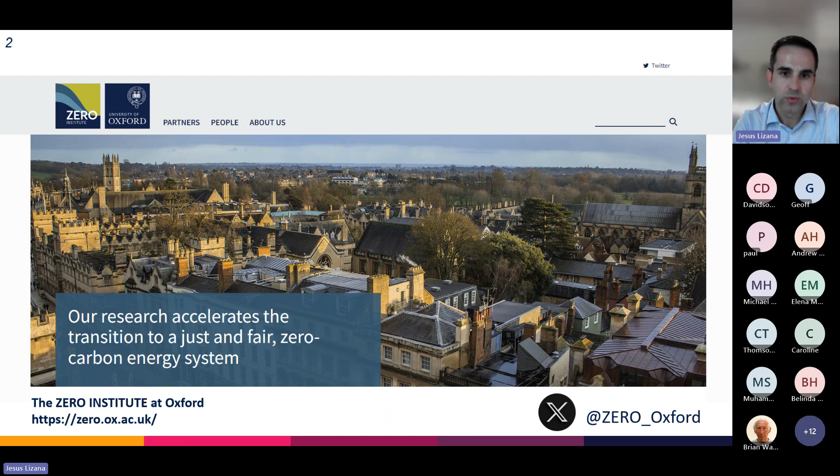Yes, well, thank you for the invitation. I am an associate professor in engineering science in the University of Oxford. I started in January as a leader of the zero carbon space heating and cooling research at the Zero Institute at Oxford, where we are working together with local partners and international institutions to try to accelerate the transition to net zero. But I started in Oxford 3 years ago as a member researcher of the Future Cooling Program, where our interdisciplinary team were working together to shape and understand the future of cooling. My presentation here will be part of the work that we were doing during this time.

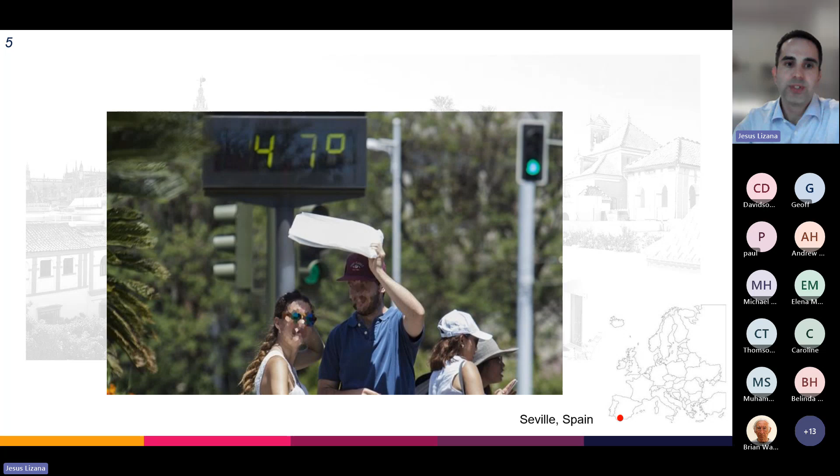But first, I would like to start talking about where I come from. I am from Seville in southern Spain, a beautiful city known for its amazing food and fantastic weather. A fantastic weather, but with last summers reaching temperatures higher than 45 degrees Celsius, something that we never saw before. This is really creating an issue in Spain, but not only in Spain, even in Oxford. You remember last summers, we saw for the first time in Oxford temperatures higher than 40 degrees Celsius. Not only in Oxford, but throughout the whole UK.

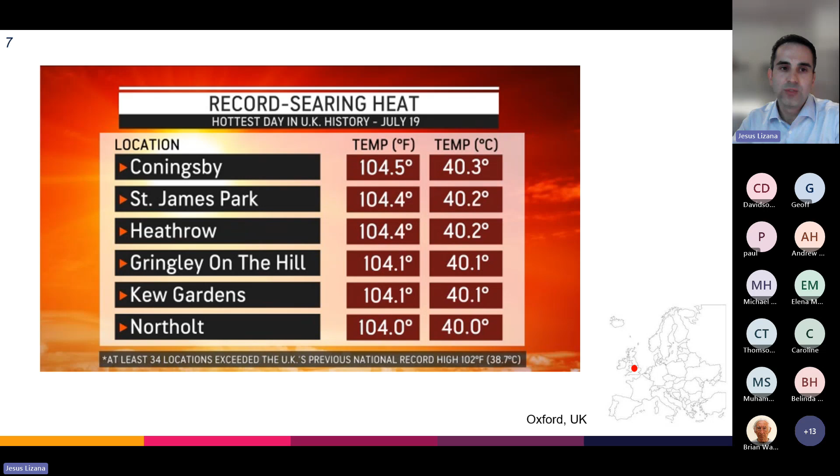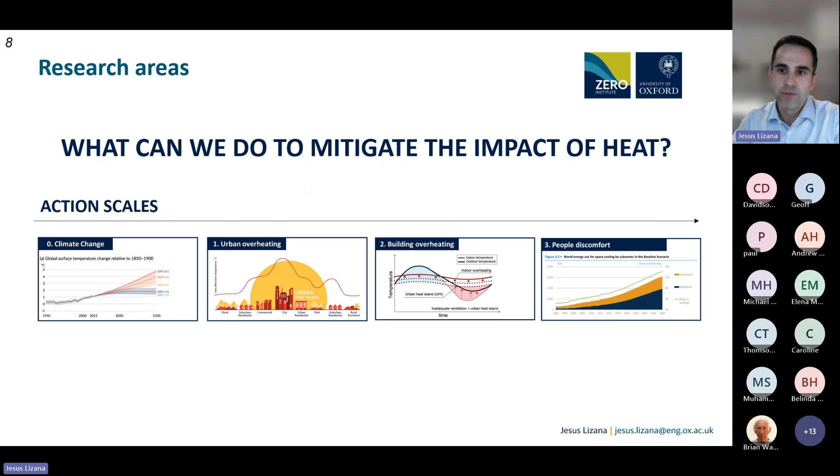We are starting to see temperatures higher, temperatures that we never saw, and temperatures which we may need to deal with in the future. So it's clear that climate change is happening faster than expected. To address this problem, we were working at different action scales to try to understand and mitigate climate change, to try to understand and reduce the problem of urban overheating, to mitigate the problem that we are having here in the UK of building overheating, and to address people's discomfort more efficiently, decreasing energy demand for cooling. A work that we lead locally and internationally, in collaboration with more than 40 organizations and institutions globally.

In this presentation, I will focus on two main points: the impact of rising temperatures, and I will talk a little bit about the impact in the UK specifically. Also, I would like to show the right steps to sustainable cooling. What can we do in the building industry, in building services engineering, to address sustainable cooling in the future? I will start with the first part, with the impact of rising temperatures.

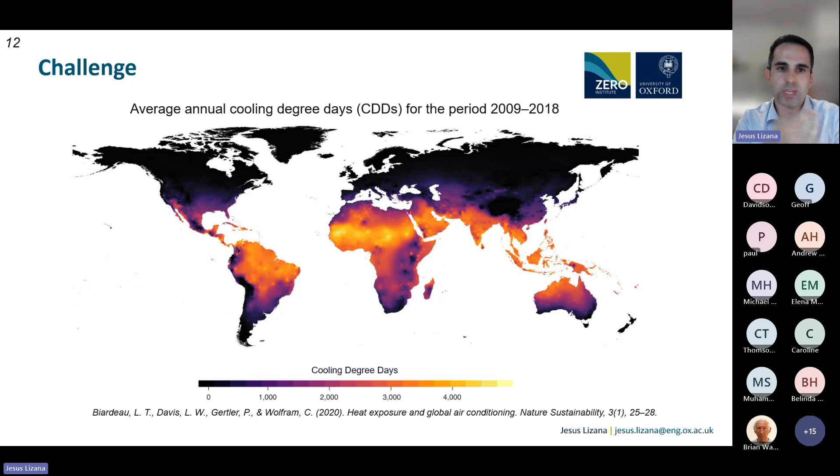Currently, most of the cooling needs and cooling demand are located in the tropics, where half of the global population lives. A common indicator that we use to quantify these cooling needs or heat exposure is cooling degree days, the indicator that you can see in this map. This is an annual indicator based on the difference between the daily average temperature and a reference temperature, often set at 18 degrees Celsius. So, for example, if we have a day with a daily average temperature of 20 degrees Celsius, for that day we will have 2 cooling degree days. Basically, with this indicator, what we do is sum all these cooling degree days per day throughout the year.

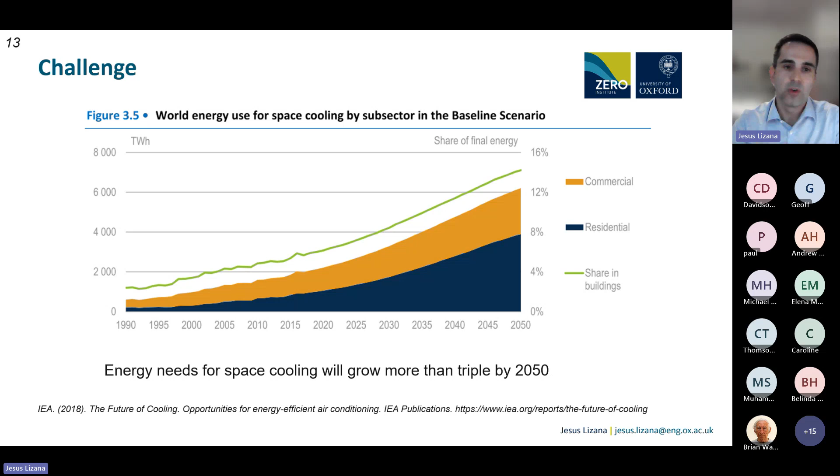Climate change is increasing this cooling demand globally, and is expected to more than triple by 2050, according to the International Energy Agency, with heat events occurring more often and longer. This is affecting seriously people, infrastructure, the environment, and the economy. It's increasing morbidity and mortality. There is even a recent report from Europe showing how 90% of all climate-related fatalities in Europe are related to extreme heat.

According to the International Energy Agency, it is projected that 10 new air conditioning units will be sold every second from here to 2050, increasing the energy demand for cooling drastically and adding additional pressure to power grids. This is going to increase the demand for fossil fuel. At the same time, in the economy, rising temperatures are also affecting productivity, starting to seriously affect strategic sectors such as tourism and agriculture. In Europe, a recent report highlighted how heat-related economic losses are right now close to 14% and increasing annually.

We might assume that extreme temperatures are the only issue here, and they may not occur frequently in the UK. But let me ask you this question: what is worse, 30 degrees Celsius or 40 degrees Celsius? Which temperature is likely to have a more severe impact on people, infrastructure, environment, or economy? Yes, this is a trick question, but it's important for explaining the next point.

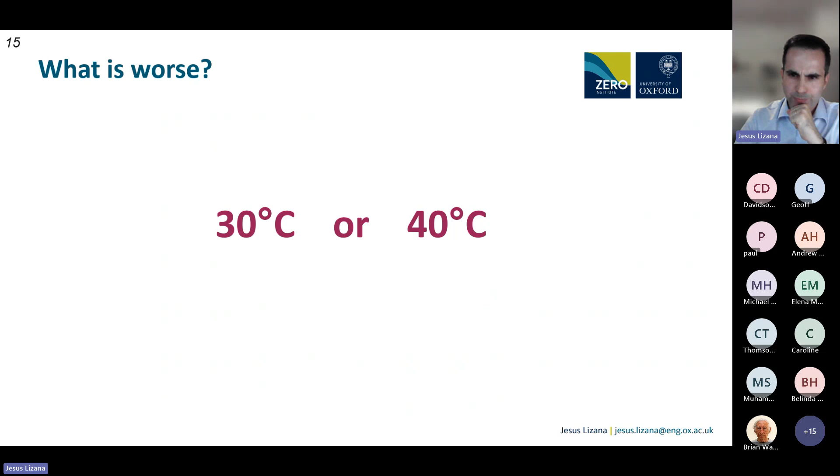I will answer the question later. A good example to understand the right answer is the definition of a heat wave. We call a heat wave 3 consecutive days with maximum temperatures meeting or exceeding a heat wave temperature threshold that is normally close to the 95th percentile of the daily maximum temperatures historically.

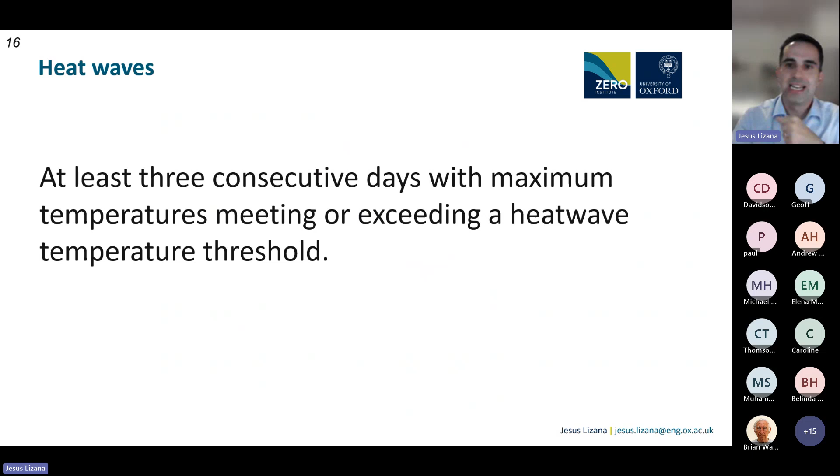Let's compare two different regions, the UK and Spain, where I come from. Something interesting is that in the UK, a day with a maximum temperature of 30 degrees Celsius is a heat wave. This will be a very extreme situation, generating a lot of impact. However, in Spain, in Seville where I come from, we can see how a day with an extreme temperature of 40 degrees Celsius is a normal day. It's not a problem. This is the most important thing to understand.

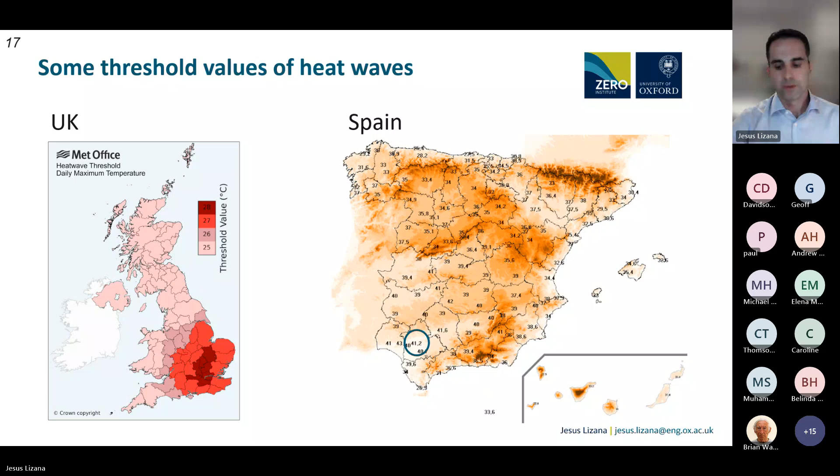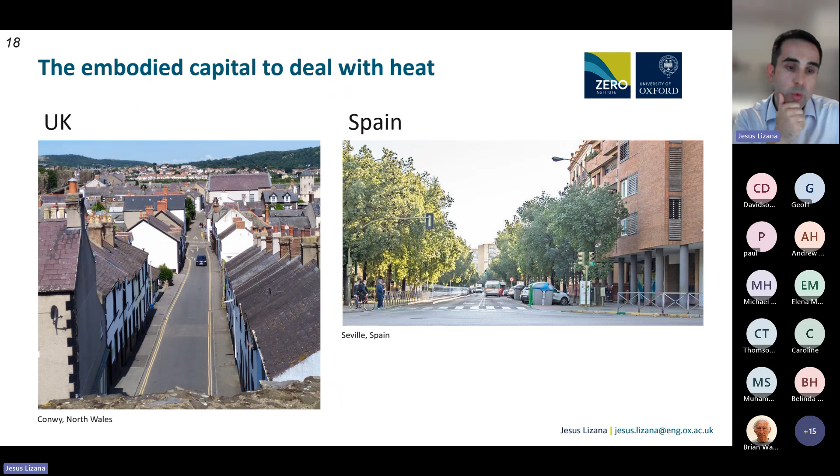Why these strong differences? The main reason is the embodied capital to deal with heat, the physical and sociocultural capital. Understanding the embodied capital in our built environment is crucial to quantify the implications of heat. Here you see two pictures, for example, in the street where I live in Seville, and one in Conwy, a city in North Wales, on a summer day.

This was the main driver that led us to our recent publication in Nature Sustainability. It is not about the maximum temperatures, it is about the relative change. In this article, we wanted to identify and quantify what countries will be highly affected by the absolute, but also by the relative change in heat, in temperatures. So we answered the following question: if the global mean temperature rise increases from 1.5 degrees Celsius to 2 degrees Celsius, what countries will experience the most dramatic increase in heat exposure and cooling requirements worldwide, in absolute and relative values?

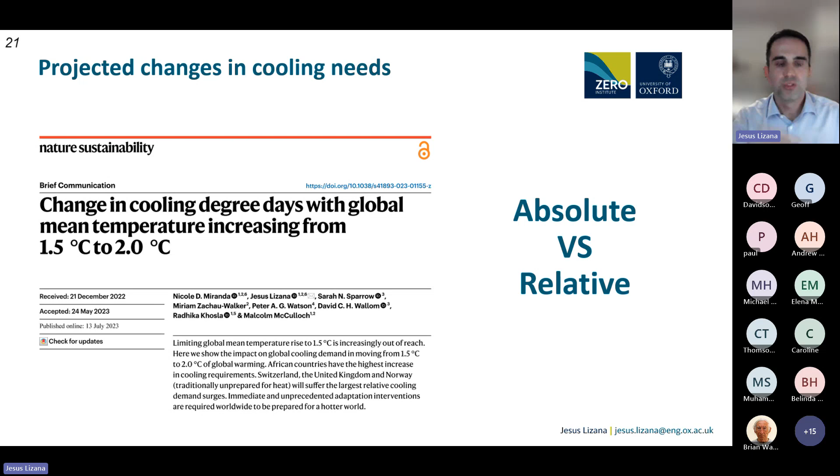Here we find something we already know, that in the tropics we have the countries that will suffer the highest absolute increase in heat exposure and cooling needs globally. Specifically, the top 10 countries most affected are in Central Africa, which will add additional pressure to the socioeconomic development of these regions. So all these regions in the tropics already have the highest cooling needs globally, but they will also suffer the highest absolute increase in temperatures.

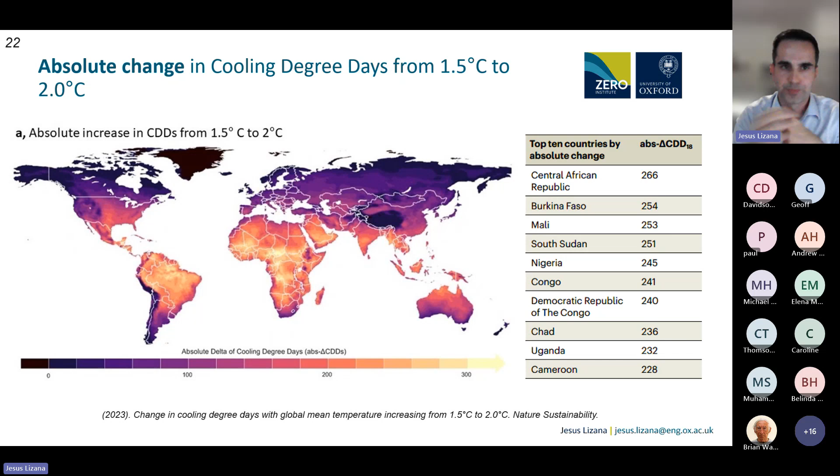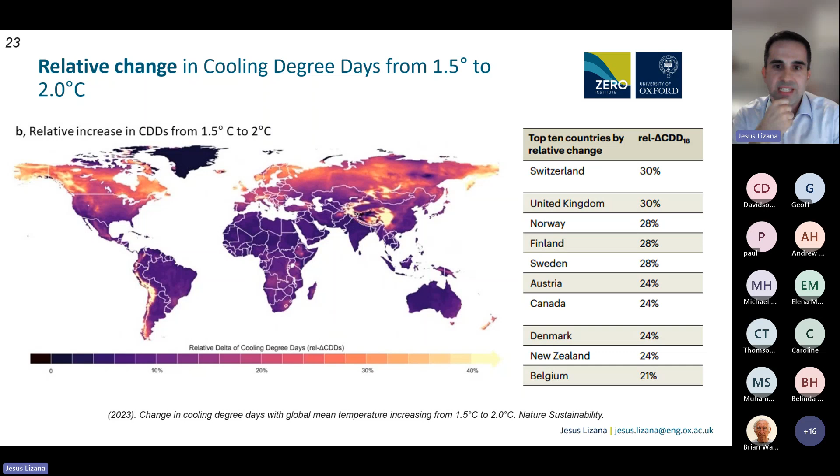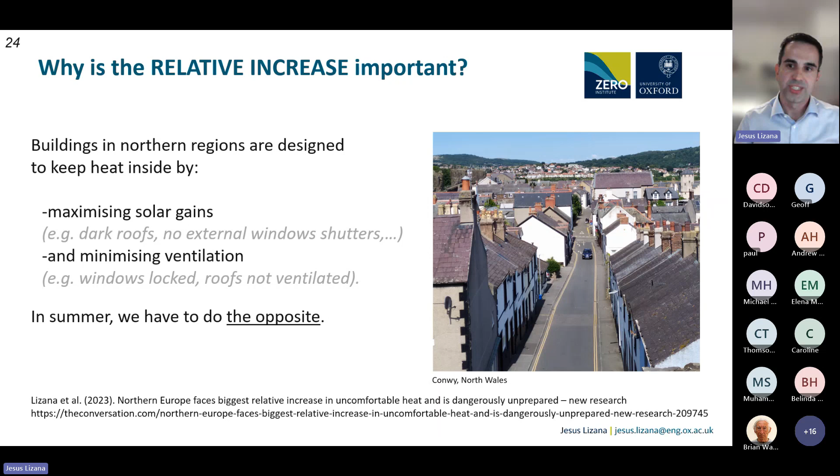Why is the relative increase important? Buildings in northern regions are designed to keep the heat inside by maximizing solar gains and minimizing ventilation, because basically what we want to do is reduce the heating needs in winter. The problem is that in summer we have to do the opposite. So here, even with a moderate increase in temperatures, the impact of the extra heat will be felt more acutely. It's important to recognize that heat is not just a concern for southern regions. Adaptation interventions and measures are needed globally to prepare for a hotter world.

But how can we avoid this problem, overheating in the north and in the south? How can we address sustainable cooling in the UK? This will be the second part of the presentation.

Let's imagine the situation, which can be a home in the UK or a home in a North European country, in which we have high solar gains with dark surfaces and no solar protection in windows. We may have windows opening outwards, so we cannot install window shutters. We have building lofts that are not ventilated, increasing the overheating. And we may even have homes that are not well insulated.

It's quite easy to see that with these conditions, we may have outside 26 degrees Celsius, but suddenly inside the temperature is much higher, even higher than 30 degrees Celsius. And this can be perfectly a normal summer day in my office here in Oxford, where outside the temperature is not that high, but inside the overheating is increasing drastically. What can we do here to address sustainable cooling and reduce this indoor overheating?

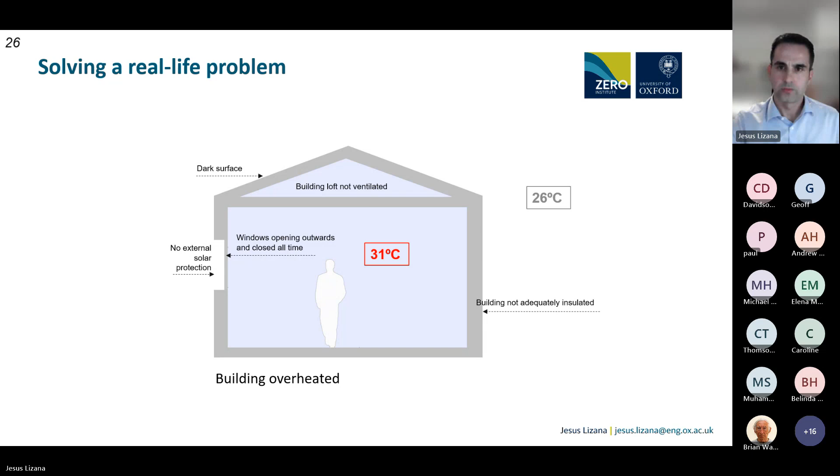First, we need to understand the real meaning of cooling. What is cooling? Cooling is not only an air conditioner. A wide portfolio of solutions for cooling is already available to address cooling efficiently.

We need to consider that the adaptation of the built environment to warmer temperatures requires the development of the best available technologies and techniques for cooling. And these cooling solutions can be classified using 5 key concepts.

Solutions for solar protection to reduce solar heat gains, for example, cool surfaces, green surfaces, or shading for openings, or adding external vegetation. Solutions for heat prevention involve mitigating or avoiding external and internal heat gains through the building.

External heat gains arise from the ambient temperature transferring heat through the building envelope. Internal heat gains can be due to human activities, appliances, or lighting coming from inside the building.

Heat modulation consists of using the thermal mass of the building to store heat gains and release them at optimal times. For example, using free cooling at night or natural ventilation at night.

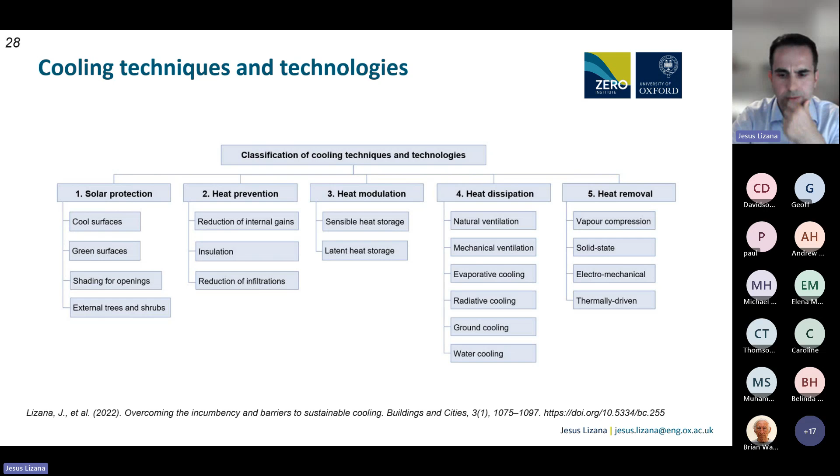Despite this extensive portfolio, the main problem is that the easiest and fastest response to address cooling still lies with the installation of an air conditioner, commonly regarded as the sole technological solution to address cooling.

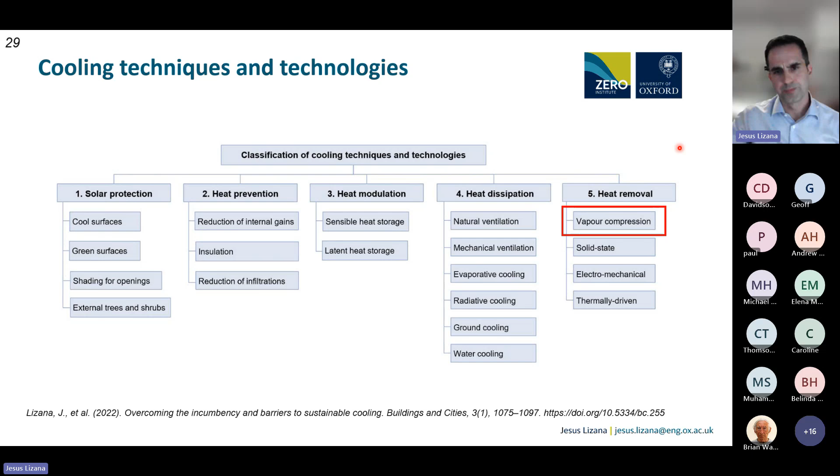With all these options, what are the right steps to address sustainable cooling? How can we do it efficiently in an optimal way? Well, our recommended steps are 8. Implemented following the right order, they can increase the heat resiliency of the built environment. They can downsize cooling systems and cooling needs. And finally, they can decrease resource consumption and mitigate the environmental impact of cooling.

Of course, these steps should be implemented considering current and future climate conditions, and considering heating and cooling as a whole in the building design. We don't want to increase the energy demand for heating in winter, and this is quite important. It's something that we need to consider carefully in the UK.

Let's start with the first 4 options, the first 4 steps. These steps are related to solutions that I was introducing previously: solutions for solar protection, heat dissipation, heat modulation, and heat prevention. Solutions that we normally call passive cooling techniques. And these solutions are not new, they are well known in the building industry.

For example, for solar protection to mitigate solar heat gains in opaque surfaces, we can implement ventilated and reflective roofs or ventilated and reflective walls. And in the openings of the building envelope, we have a large portfolio of shading devices that we can integrate in buildings according to the building orientation to reduce the amount of solar heat gains.

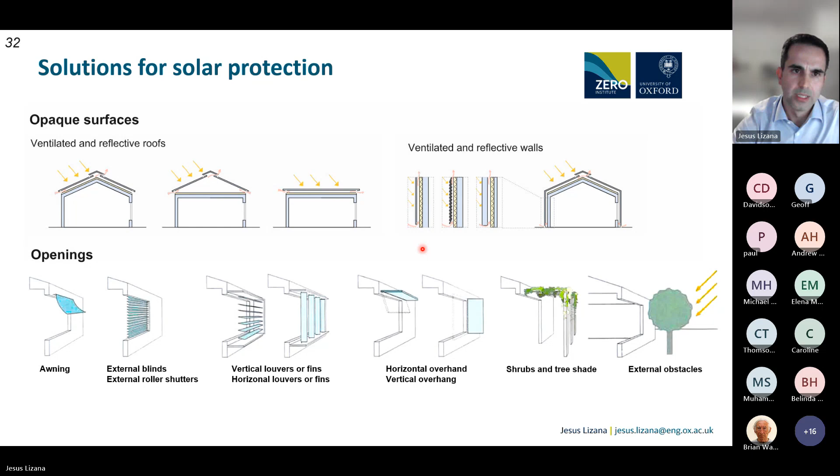The same for heat dissipation. In this case, for natural ventilation, we can promote natural ventilation driven by wind, by solar, or by the stack effect. We can find really powerful solutions, for example, cross ventilation or using ventilation chimneys. We can increase the air change rate in the building largely.

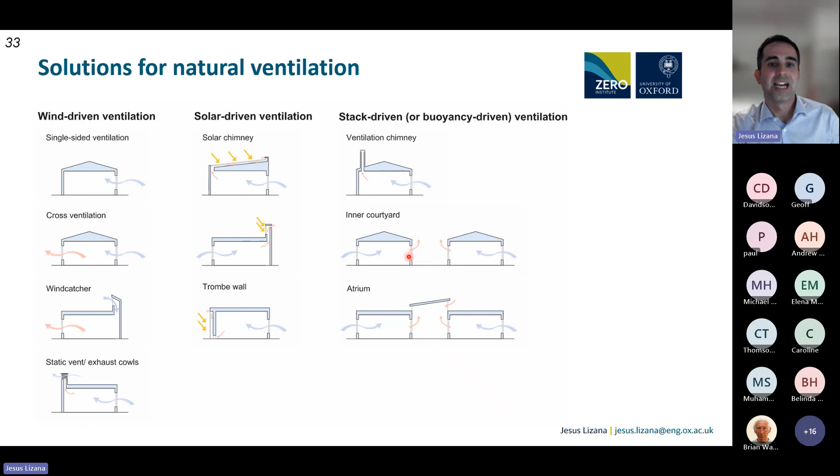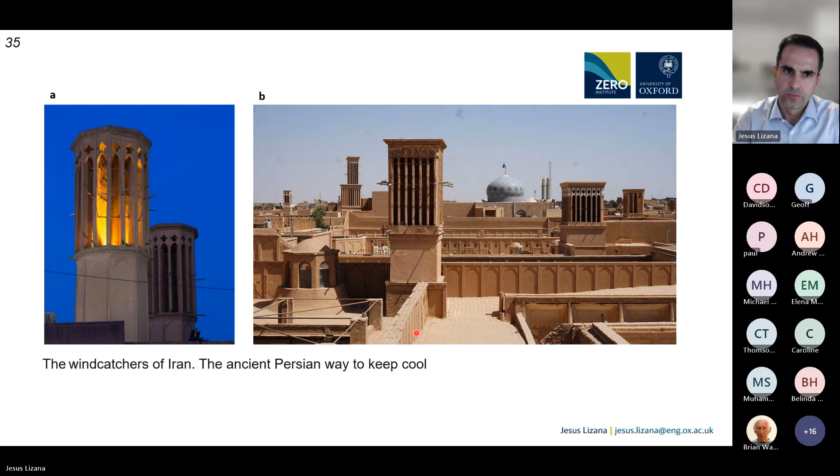If we address these 4 steps efficiently, we have a great chance of eliminating the need for air conditioning. But even if not, we still have different alternatives that we can integrate to reduce even more the cooling needs and downsize the cooling systems.

The 5th step consists of using more thermal comfort variables to create comfort. And the 6th step is recognizing the individual real cooling needs through an occupant-centric technology or design.

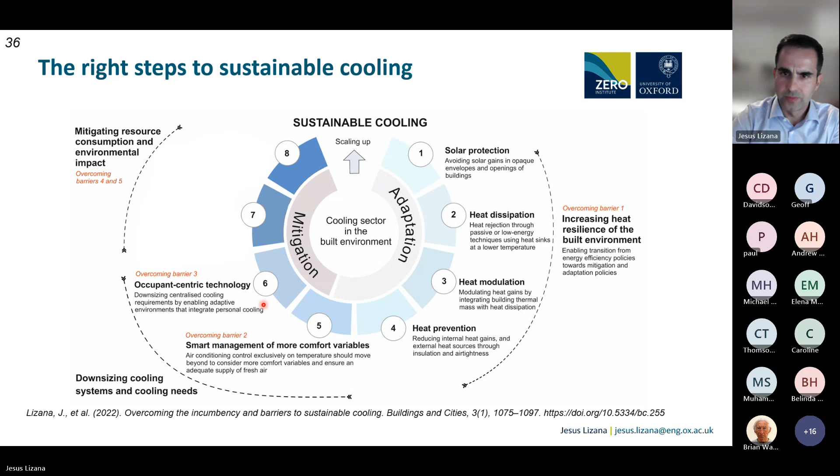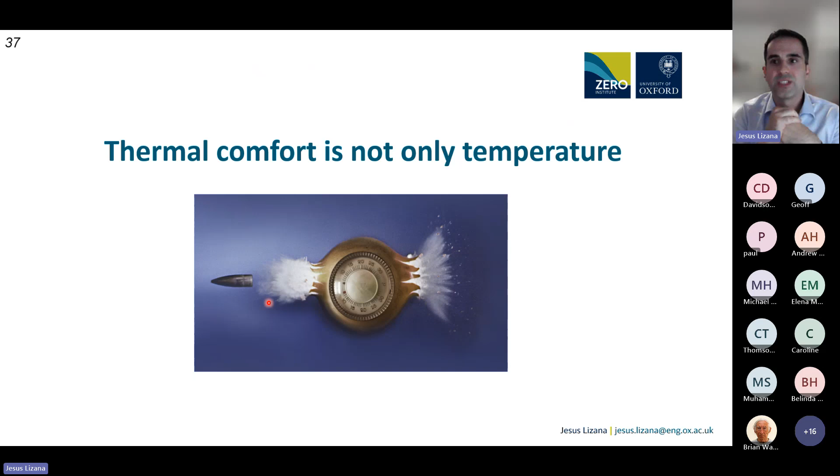First, we need to realize that thermal comfort is not only about temperature. The temperature value that we commonly see in a thermostat is the dry bulb temperature. But this is not the only indicator telling us that we are in thermal comfort.

We have 4 environmental variables and 2 personal factors affecting thermal comfort. The 4 environmental variables are humidity, air speed, air temperature or dry bulb temperature, and mean radiant temperature. And the 2 personal factors are metabolic rate and clothing insulation.

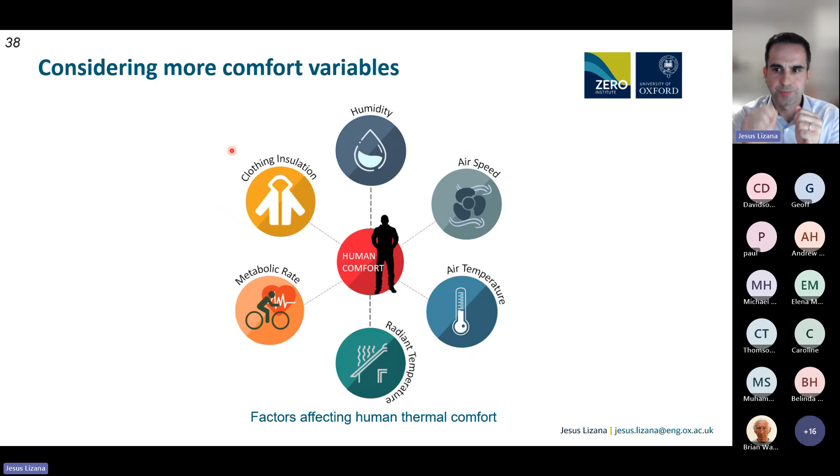The opportunity that we have here is that using more thermal comfort parameters, for example, a higher air speed or a lower mean radiant temperature, we can modify the temperature range of the comfort zone in which people feel comfortable. And this is very interesting for cooling.

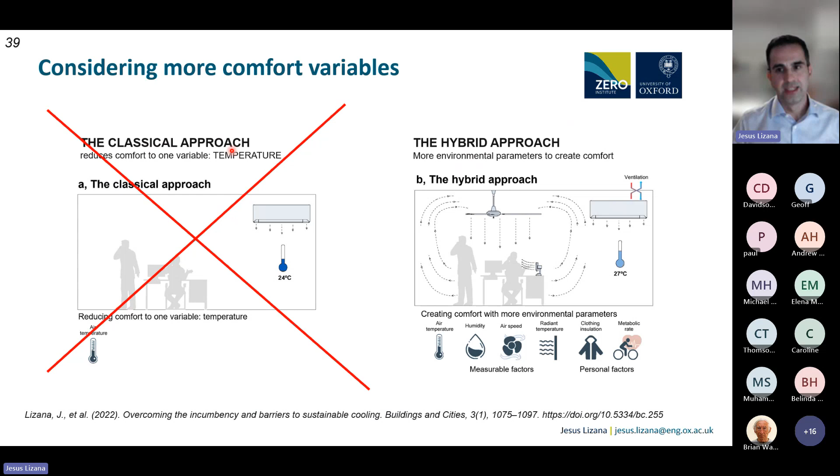We need to move from the classical approach where we control cooling only using dry bulb temperature, to a hybrid approach where we can create a comfort environment even at 27 degrees Celsius, but only by increasing the air speed. And this is something that we can do without sacrificing comfort.

The next step is about remembering something very important: we need to cool people, not just buildings. Because most of the time we are cooling people more than needed, or even cooling empty spaces in buildings. And now even more with this hybrid working environment that we created after COVID, where we frequently work from home.

The concept here is to reduce the centralized comfort criteria. For example, increasing the set point temperature from 24 to 27, and providing an alternative to occupants by implementing adapted environments with personal cooling. This can help even more to downsize centralized cooling systems, reducing the peak cooling load and decreasing the investment and operating costs for cooling.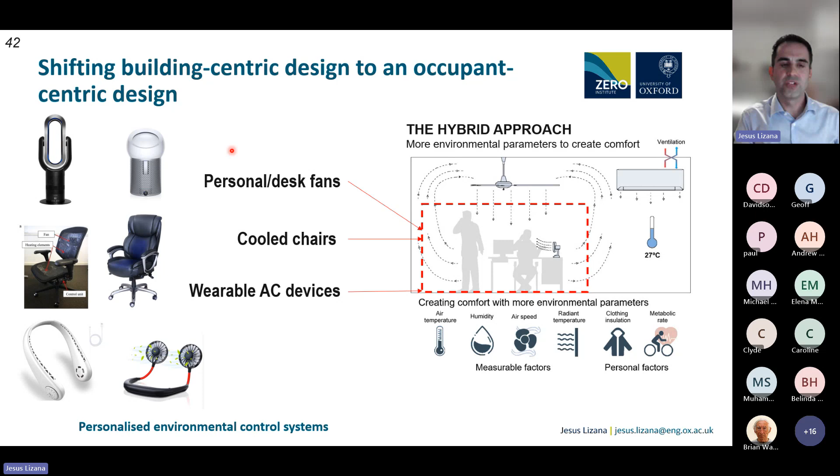The target here is to shift from a building-centric design to an occupant-centric design. And we can see even now in the market, there is a growing trend with more and more cooling devices designed to create these personalized environmental control systems.

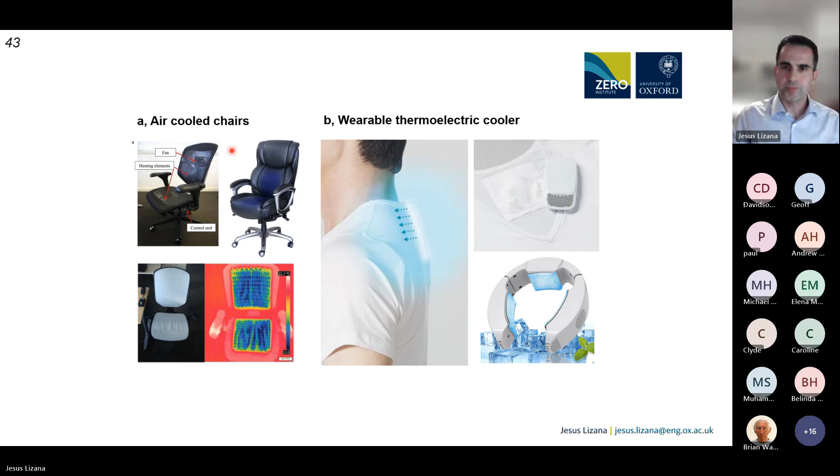Even the ASHRAE standard already included in the last update of the handbook of fundamentals this huge opportunity that we have for cooling by using more thermal comfort variables and introducing these personalized environmental control systems.

This is the most important point I would like to highlight in this presentation. Only by modifying the set point temperature by 1 degree Celsius, we can reduce the energy consumption between 5 and 10%, which is huge.

What we are suggesting is to move from this classical approach that reduces comfort to one single variable, for example 24 degrees Celsius in this conventional approach, to a hybrid approach where we can start using more thermal comfort variables, for example introducing ceiling fans to increase the air speed, or creating these personalized environmental control systems.

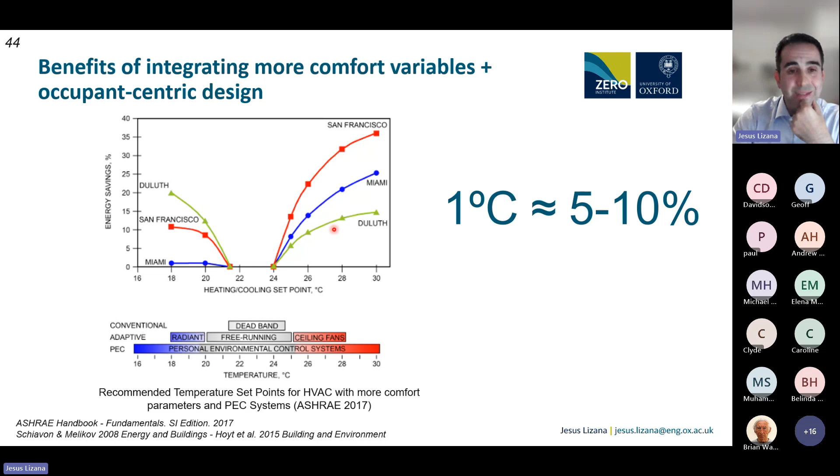Integrating these strategies, we can easily increase the thermostat temperature of our built environment without sacrificing comfort, and reducing the energy demand for cooling hugely.

If after these 6 steps, we still have cooling needs, we have 2 last steps that will help us to mitigate resource consumption and environmental impact for cooling.

They are related to the focus on life cycle and the increase of renewable energy.

With the focus on life cycle, what we want to make sure is that we integrate super efficient equipment in real operating conditions with high durability, adequate maintenance, and most importantly, using ultra-low global warming potential refrigerants.

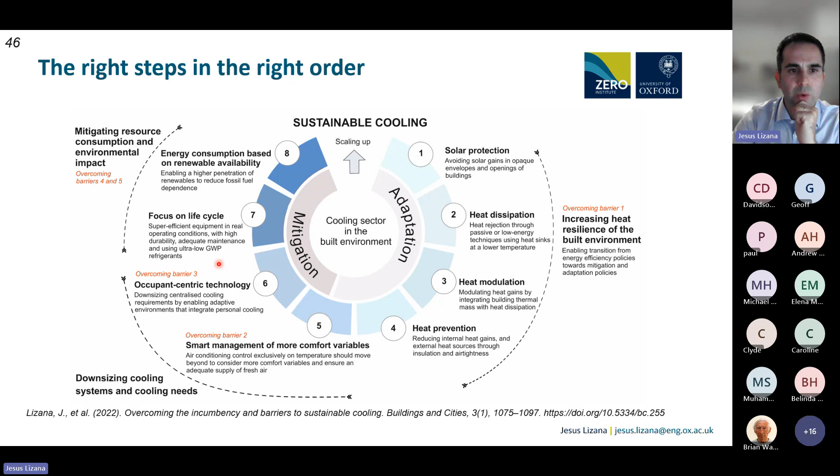F-gases used in air conditioning are responsible right now for more than 1% of global greenhouse gas emissions over the last 20 years, and they are projected to be between 9 and 19% by 2050 if emissions continue business as usual.

What alternative can we implement here? Well, the alternative will be the use of low global warming potential refrigerants, for example ammonia, carbon dioxide, or propane.

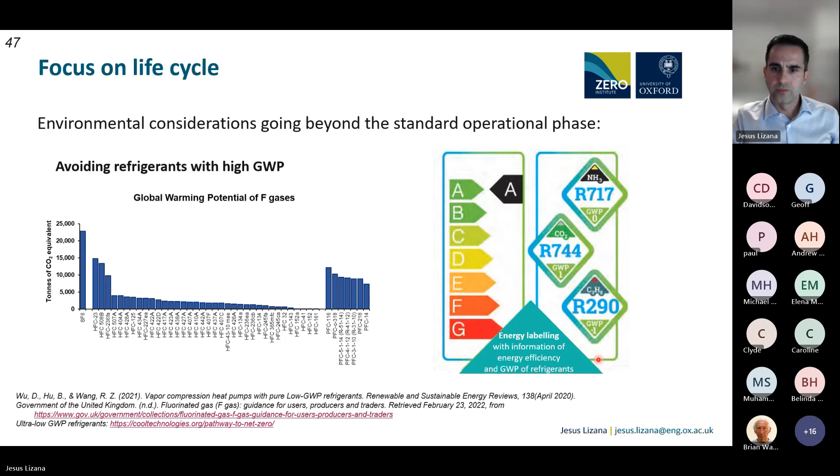Finally, we need to maximize the use of renewable energy for cooling. Here, thermal energy storage and energy flexibility can play a critical and very important role. This is super interesting in the case of cooling, since cooling flexibility can benefit from two important aspects. First, it's not the same to operate the air conditioner at daytime at 40 degrees Celsius as at nighttime, when maybe we have 20 or 25 degrees Celsius.

If we operate the system in better operating conditions, for example at night with lower outdoor temperatures, we can increase the seasonal efficiency by more than 25%. At the same time that we have this higher efficiency, this is something we can combine with higher availability of renewable energy, and of course something associated with a much lower electricity tariff. When we combine all these things together, we can have a reduction in operating cost by more than 50%.

Here you can see one example of the conventional operating mode, consuming energy from the grid as soon as we need cooling. On the other side, implementing these energy flexibility strategies for cooling increases the seasonal efficiency of the system, while at the same time we consume more renewable energy and pay less for electricity.

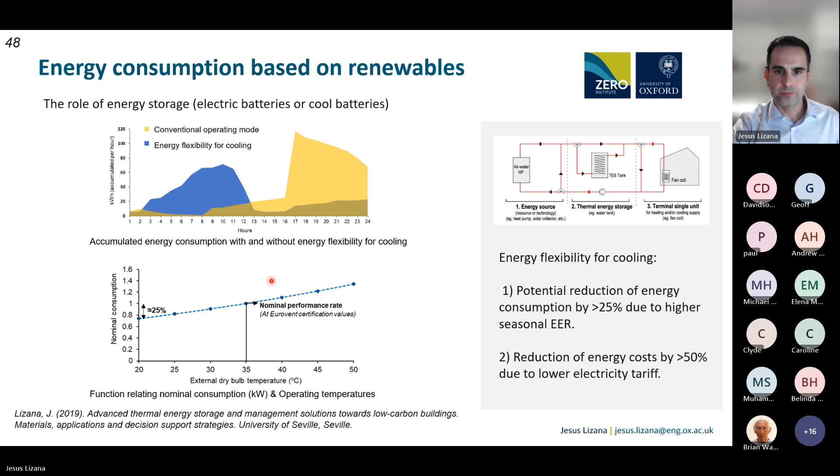This will be the end of this presentation, but what are the key messages I would like you to keep after this presentation? The first one is to remember, it is not about the absolute or the maximum temperature. The relative change is critical, and here the UK is not prepared.

In summer, it's really important: ventilate first and insulate later. Otherwise overheating will increase. This is one of the major problems we have in the UK. We are starting to insulate to reduce energy demand for heating in winter. However, when we insulate and don't modify solar heat gains, and don't address ventilation properly, we are creating a greenhouse where overheating will be an issue.

The third one is to remember, thermal comfort is not only about temperature. We can create comfortable environments even at 27 degrees Celsius, and a very easy strategy is using ceiling fans, for example.

The last one, the most important thing I would like to transmit to you, is that all these actions require time and long-term planning. We will face some heat events next summer, and you will remember this presentation. However, the easiest and fastest response will always be to buy an air conditioner. So it's important to start addressing these issues in our homes as soon as possible.

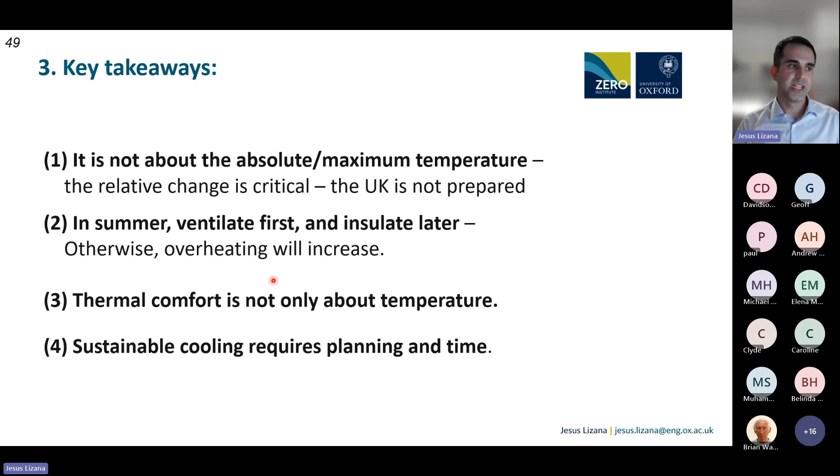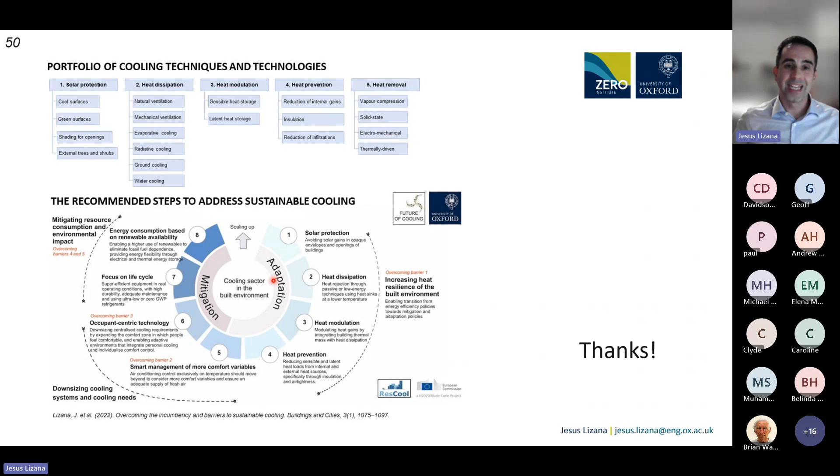And of course, considering heating and cooling as a whole in the building design. We don't want to increase energy demand for heating in winter. I can tell you that following these steps, sustainable cooling is guaranteed. And this is the end of the presentation. Thank you very much.